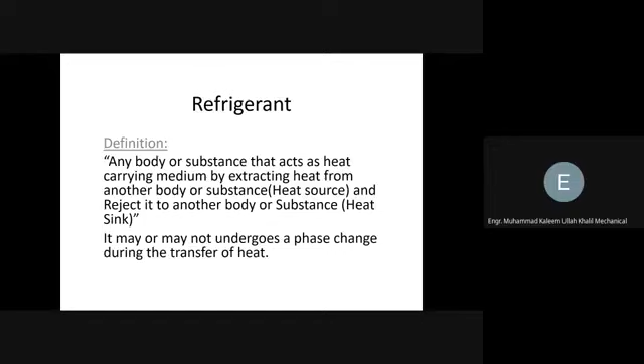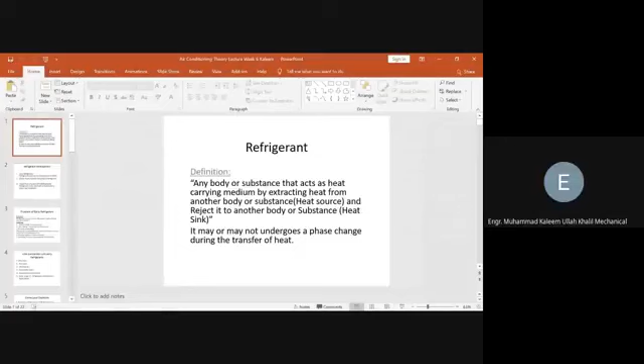Initially, we had early refrigerant prior to the development of CFCs.

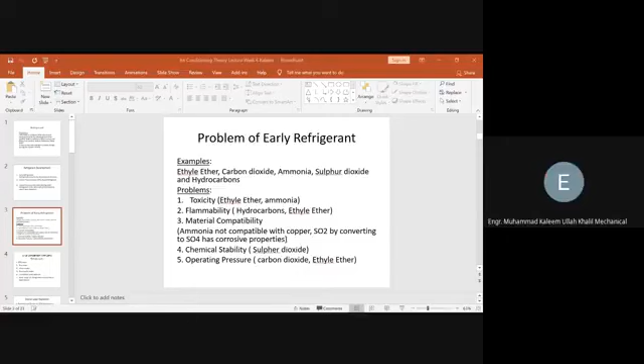Chlorofluorocarbons were non-toxic, they were inflammable, they were chemically stable, they were compatible with the material, and the wide range of the refrigeration temperature application were possible with the chlorofluorocarbon.

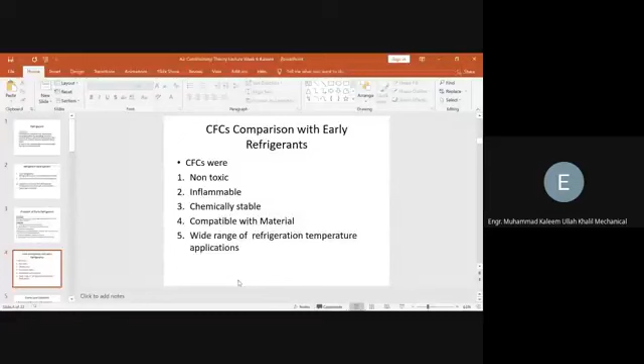اچھا، سو لیٹس گو ٹو دا نیکسٹ سلائڈ۔ جس طرح میں نے کہا ہے پریویس سلائڈ میں دیٹ دا سی ایف سیز ور ریسپانسبل فار دا اوزون لیئر ڈپلیشن، اور اس کی فرسٹ جو تھیوری پیش کی تھی وہ دو سائنٹسٹ نے پیش کی جس کو میں نے بلٹ فارم میں لکھا ہوا ہے۔

ان 1974 they developed the theory of ozone layer depletion due to CFCs۔ ٹھیک ہے، کس طرح سے اوزون لیئر ڈپلیٹ ہوتا تھا، اور پھر ایک پروٹوکول جس کو مونٹریل پروٹوکول کہتے ہیں، اس میں مختلف کنٹریز نے ایگریمنٹ کی کہ اس کو ہم بین کریں گے۔

اور ان ریفریجرنٹس کو جن کی وجہ سے اوزون لیئر ڈپلیٹ ہوتا تھا اس کو بین کیا گیا، اور بیننگ کے بعد لوگوں نے اس پر سٹڈیز کیں، اور اس کے بعد ہمارے پاس یہ ایچ ایف سیز بن گئے جن کی اوزون لیئر ڈپلیشن پوٹینشیل زیرو تھی۔

تو کس طرح یہ اوزون لیئر ڈپلیٹ ہوتا ہے اس کے لیے کچھ کیمیکل ایکویشنز وغیرہ ہم لکھیں گے اور اس سے یہ کلیئر ہو جائے گا۔

اچھا، سو فار دیٹ آئی ول گو ٹو دا پینٹ فائل، اور اس سے پہلے ایک سلائڈ میں کاپی کروں گا۔ ٹھیک ہے، اچھا، اس میں ایک منٹ۔

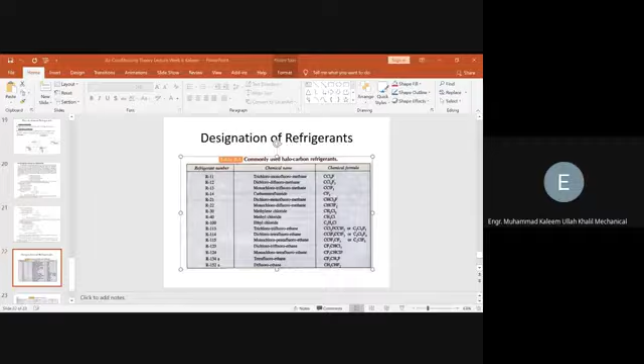اچھا، which element was responsible for the ozone layer depletion? The chlorine atom in CFC۔ ٹھیک ہے، اس کے کچھ ایکویشنز ہیں، کیمیکل ریئیکشنز ہیں، وہ ہم تھوڑا سا اسٹڈی کریں گے۔

اچھا، آپ کو پتہ ہے کہ ہمارے پاس ارتھ کے سراؤنڈنگ میں یہ پینٹ فائل شیئر ہو گیا ہے یا نہیں؟ یس سر۔ اچھا، ایک دوسرا فگر ہے، یہ بھی میں پیسٹ کر دوں تاکہ آپ کو پتہ چل سکے۔

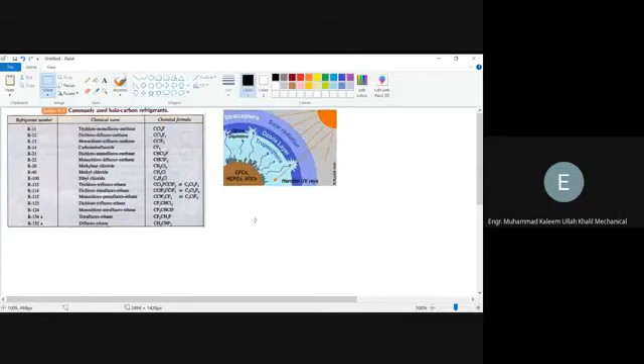یہ نظر آ رہے آپ کو؟ یس سر، جی سر، یس سر۔

اچھا، اس میں یہ لکھا ہے، یہ اندر جو پنک ٹائپ کا ایک سرکل ہے، یہ سی ایف سیز، ایچ سی ایف سیز اور وی او سیز ہیں۔ یہ وی او سیز کا مجھے نہیں پتا کہ یہ کیا چیز ہے، لیکن کلورو فلورو کاربن ہے اور ہائیڈرو کلورو فلورو کاربن ہے۔ ایچ سی ایف سیز، ایچ اسٹینڈ فار ہائیڈرو، سی اسٹینڈ فار کلورو، ایف اسٹینڈ فار فلورین اینڈ لاسٹ سی اسٹینڈ فار کاربن۔ They are basically the derivative of the hydrocarbon, اور these are responsible for the ozone layer depletion۔

تو ارتھ کے سراؤنڈنگ میں ایک لیئر ہے جس کو ٹروپوسفیئر کہتے ہیں، اس کے بعد ہمارے پاس اوزون لیئر آ جاتا ہے، پھر اسٹریٹوسفیئر ہے۔ تو سن سے ایک طرف ریڈیشن ایمٹ ہوتی ہے، ان میں مختلف ریڈیشن ہیں، ان میں سے ایک ultraviolet radiation ہے۔

That ultraviolet radiation can reach up to the stratosphere layer, but when it meets the ozone layer, it cannot pass through because the ozone layer is made of O3 and that can absorb or filter all of the radiation, filtering out the ultraviolet radiation. Now what happens is when CFCs are charged inside the unit and by some unfortunate situation they leak out of the unit and go to the troposphere, they are chemically stable. Once they reach the ozone layer, inside the ozone layer they cause the depletion.

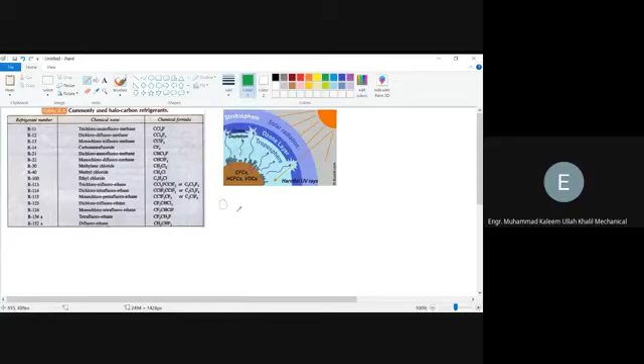اس کے لیے ہم کچھ کیمیکل ایکویشن لکھیں گے۔ سب سے پہلے ہمارے پاس جو اوزون لیئر ہے وہ کس طرح سے بنتا ہے۔ آپ کو پتہ ہے کہ ایئر کے اندر آکسیجن مالیکیولز ہوتے ہیں۔ یہ الٹرا وائلٹ ریڈیشن کی پریزنس میں جب میچ ہوتی ہے تو اس سے دو ایٹامک آکسیجن بن جاتے ہیں، اور یہ ون ایٹامک آکسیجن اگین کمبائن ود دا O2 اور وہ O3 بناتے ہیں۔

This O3 is basically the ozone layer, one of the molecules of the ozone layer. اس O3 میں کیا ہو رہا ہے، O2 جو ہے O میں کنورٹ ہوتا ہے اور پھر O2 دوسرے O کے ساتھ مل کے O3 بنا دیتا ہے۔ تو الٹرا وائلٹ ریڈیشن اس میں ایک طرح سے یوز ہوتی ہے۔

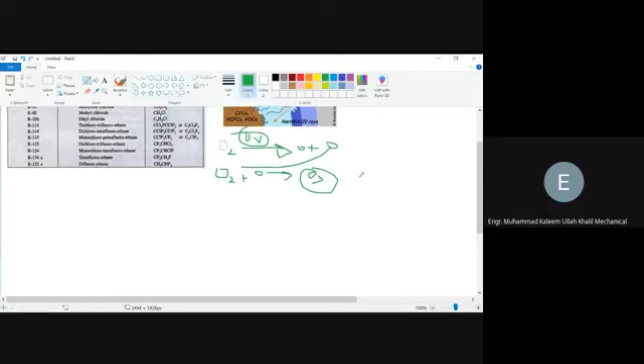سملرلی جب CFCs یعنی کلوروفلوروکاربن، اس میں R12 جو ریفریجرنٹ ہے، اگر اس کا فارمولا دیکھیں تو دس از ڈائی کلورو ڈائی فلورو میتھین۔ یہ میتھین سے بنا ہوا ہے اور اس میں دو ہائیڈروجن کلورین سے ریپلیس ہوئے ہیں اور دو ہائیڈروجن فلورین سے ریپلیس ہوئے ہیں۔ میتھین کا کیمیکل فارمولا دیٹ از CH4۔

اب اس میں جو 4H ہے اگر اس میں سے دو کو کلورین سے ریپلیس کر دیں، تو ڈائی کلورو، اور دو ہائیڈروجن کو میں ریپلیس کرتا ہوں کلورین سے۔ ایز اے ریزلٹ، اور باقی ہائیڈروجن کو فلورین سے ریپلیس کر دیں تو ہمارے پاس یہ ریفریجرنٹ بن جائے گا R12۔ اس کو R12 کیوں کہتے ہیں یہ آنے والی کلاس میں پڑھیں گے کہ کس طرح یہ R12 ہے۔

بیسیکلی اس میں یہ فلورین ایٹم ہے this is not responsible for the ozone layer depletion while the chlorine atom is responsible for the ozone layer depletion۔ تو لیٹ سے یہ مالیکیول الٹرا وائلٹ ریڈیشن کے کیس میں جب اس کو الٹرا وائلٹ ریڈیشن مل جائے تو ایز اے ریزلٹ اس سے ایک ایٹامک کلورین پروڈیوس ہو جاتا ہے، in the presence of the ultraviolet radiation۔

یہ کلوروفلورو کاربن جو ہے R12 ریفریجرنٹ، اس میں ایک ایٹامک کلورین پروڈیوس ہو جاتا ہے اور ایک بائی پروڈکٹ ہمیں مل جاتا ہے CClF2۔

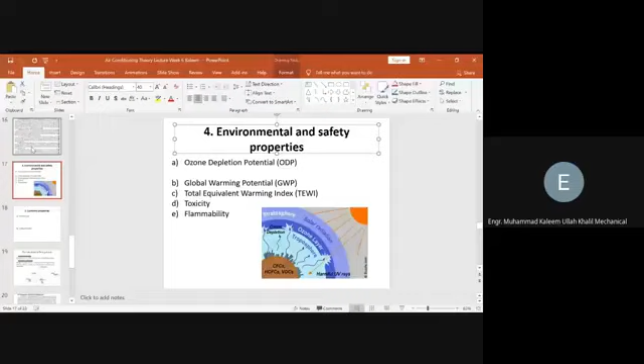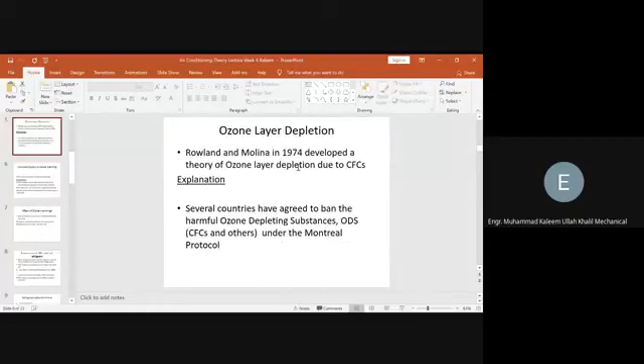Okay, so the second disadvantage was the contribution to global warming, CFC's contribution to global warming.

First of all, tell me what is global warming. Any student can answer. What is global warming? The average increase in temperature on the Earth's surface, sir. Say it again. The average temperature increase on the Earth's surface, sir.

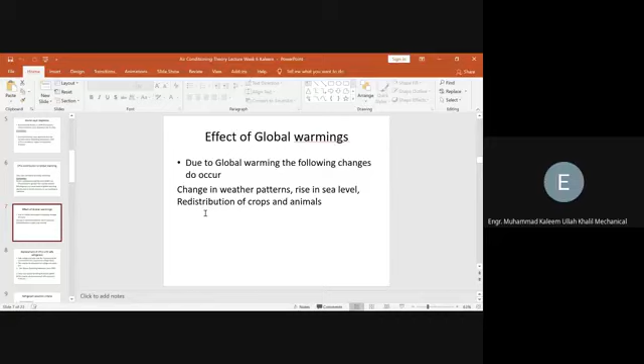Safe refrigerants, both safe for humans and for the environment, are required for refrigeration.

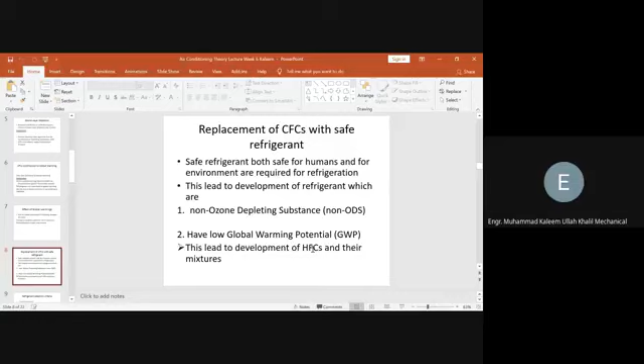Now the second discussion will be the refrigerant selection criteria. On what criteria should we select the refrigerant if you are designing a refrigerator or air conditioner? There are 5 different properties. The first one is the thermodynamic property of the refrigerant. This is very important if you are improving the performance of the system, or, in short words, if you are improving the COP.

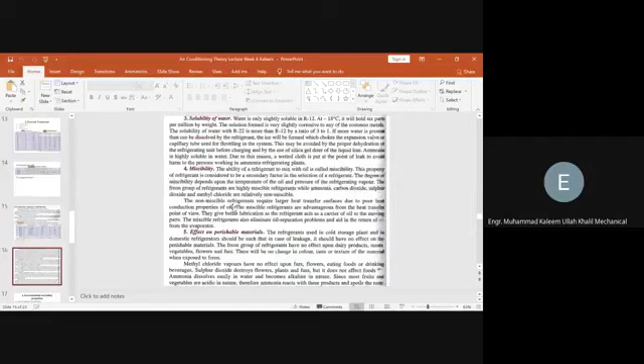What is their impact? Then there are physical properties. We should also look at the physical properties because they tell us about the stability, the inertness, and compatibility with the material. Similarly, there are the chemical properties, such as flammability, toxicity, solubility in water, miscibility, and effect on perishable material, which we will discuss over here. We will study these one by one.

No, the most important out of these 5 properties is the environmental and safety property. We should not compromise on this property number 4. We can compromise on the other properties, but first we have to make that refrigerant environmental, as well as we will make it safe for the human beings that are residing inside that building. So we should not compromise on the property number 4. Otherwise, we can compromise on the other properties.

Similarly, we can compromise on the economics of the refrigerant because we can compromise on the price. We cannot compromise on the environmental and the safety properties of the refrigerant. We have to keep this in focus, or we have to keep it on our priority list.

So the thermodynamic properties are the evaporator pressure. Now I have a question: what will be the impact of the refrigerant regarding the evaporator pressure? Let's say the evaporator temperature, the design temperature that is required inside the evaporator, is 5 degrees C. So you have a list of refrigerants which can provide you the 5 degrees C temperature, but some of the refrigerants can provide this 5 degrees C temperature at a high pressure, while some provide that temperature at a low pressure.

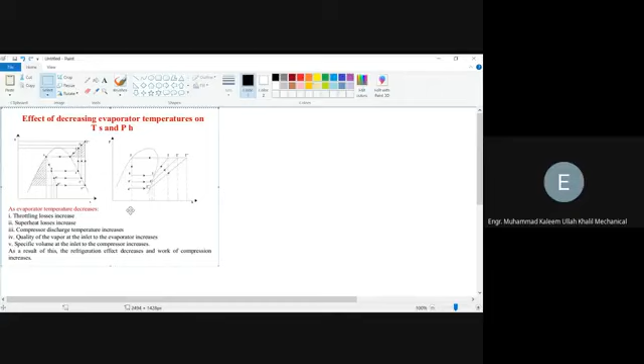The highest one. Because with the highest pressure, the operation starts from point 4, and onward from 4 to 1, the refrigerating effect is high because the throttling loss is very small from 4 to 1. Similarly, the work required during the compression from 1 to 2 is very small as compared to that one. Are you getting this point or not? Yes, sir.

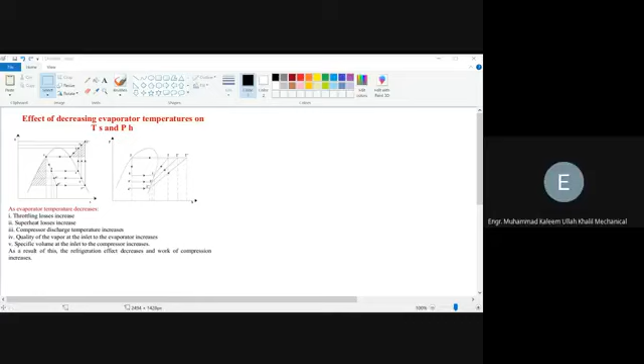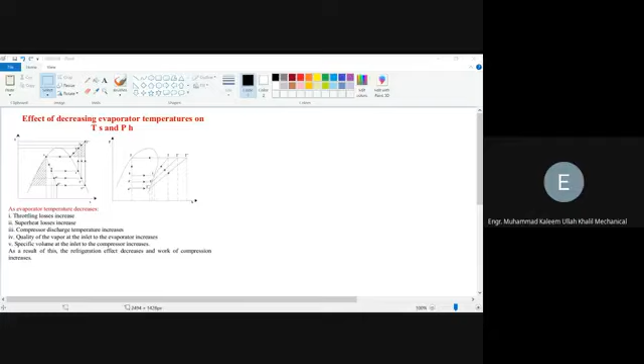So let's say you have 5 refrigerants, and out of the 5 refrigerants, one refrigerant is providing you 5 degree C temperature in the evaporator, and that is at a high pressure. So you will select that refrigerant out of that list. Okay?

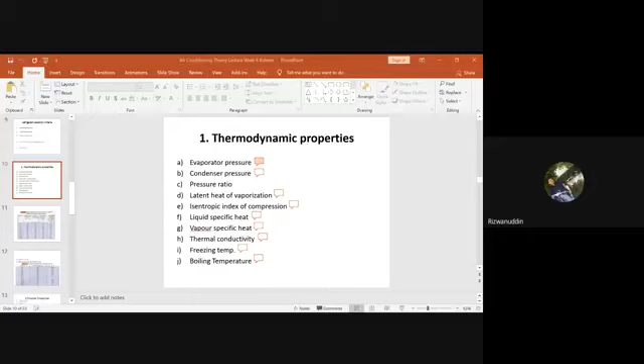Exactly. The work of the compressor basically depends on the exit pressure, or the discharge pressure of the compressor, as well as the inlet or the suction pressure. So with respect to the suction pressure, you need to make the suction at a high pressure. If the compressor is pumping it from the high pressure, the initial is high pressure and the final you have also reduced, so the work consumed inside the compressor will basically be low.

So you need to select that refrigerant which can provide you the design evaporator temperature at a high pressure, and also, if that refrigerant is capable of providing you a low condenser pressure for the design temperature of the condenser, then that refrigerant will be beneficial with respect to the performance, that is the COP, the coefficient of performance of the unit. Any question on property B, which is the condenser pressure?

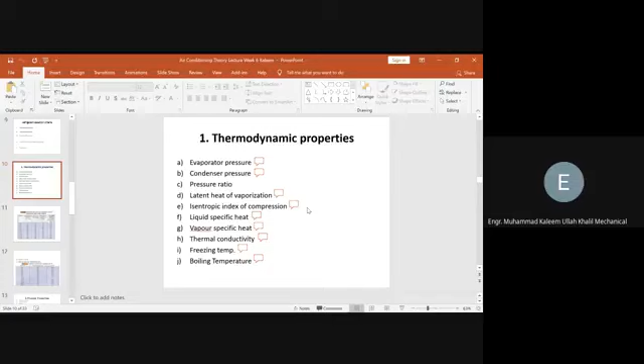Since isentropic compression is taking place inside the vapor compression process, the index of compression will be gamma. So the refrigerant which has a high gamma value, the exit temperature after compression will be very high. So you will select the refrigerant which has a low gamma value, for which the exit temperature of compression will be a little lower, and that will not be sufficiently high to cause burning or overheating of the compressor material.

You can also confirm this from this comment. Here it is written that the isentropic index of compression should be small, because the temperature ratio Tc by Te, which is the condenser temperature to the evaporator temperature, is equal to Pc by Pe, the pressure ratio of condenser to evaporator pressure, raised to the power gamma minus 1 by gamma. So greater the value of gamma, the higher this whole power value will be.

So when this is high, Tc will actually be high, because if we multiply by Te on both sides, we can cancel Te in the denominator, and on the right side it comes in as multiplication. So Tc actually depends on the pressure ratio raised to gamma. So greater the gamma, higher will be the exit temperature of the condenser or the temperature of refrigerant leaving the compressor. This should not be very high, because it will produce a very high temperature at the exit.

And since the electrical windings inside the compressor are directly in contact with the refrigerant coming out of the cylinder of the compressor, once they come out of the cylinder and piston, they come into the casing in which the whole cylinder and piston arrangement and the electrical winding are enclosed. So if the temperature is very high, it can cause heating of the electrical winding of that particular hermetic type compressor.

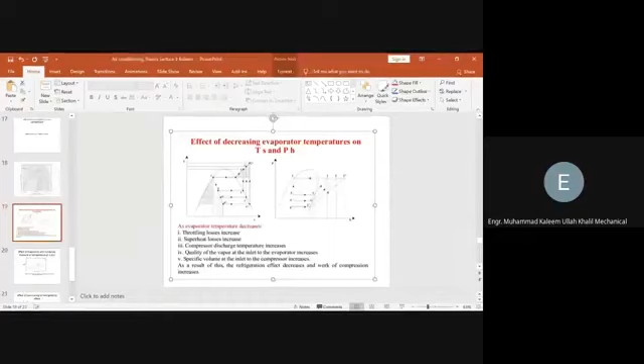Can anyone tell me the effect of subcooling on the COP?

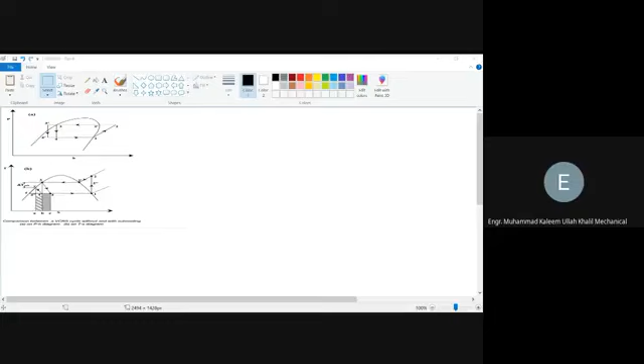Can you see this slide?

The property G is the vapor specific heat of the refrigerant. The liquid specific heat should be low so that you can bring a large change in its temperature in order to get the advantage of increasing the subcooling, which actually increases the refrigerating effect.

But the vapor specific heat should be very high. What is the advantage of high vapor specific heat? It means you need to provide a large amount of heat to the refrigerant to increase its temperature by 1 degree. If the refrigerant enters the compressor at high temperature, the volume sucked by the compressor will be high, the specific volume will be high, while the density of the refrigerant will be very low.

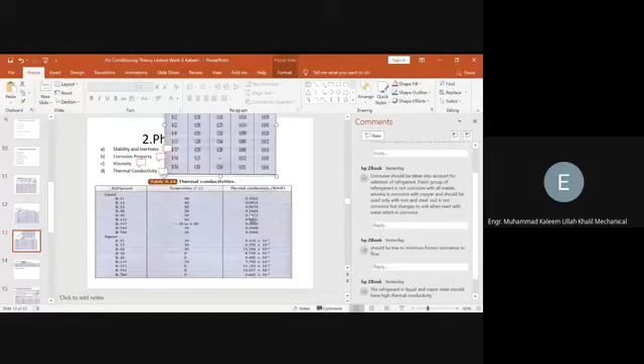Let's go back to that slide. Or what about the freezing temperature of the refrigerant? Let's say the design evaporator temperature is 5 degrees C, and you are using the refrigerant which has the freezing temperature of 5 degrees C, or higher than 5 degrees C, then you cannot use that refrigerant in that unit, because at 5 degrees C it will freeze inside the evaporator and it will choke the whole unit.

It will stop the flow of the refrigerant, because some of the refrigerant will freeze or change into the solid state, and once the tubes are closed, that is known as the choking of the tubes, then the refrigerant will not be able to circulate inside that unit. So at the given design evaporator temperature, you will need to select the refrigerant which has a very low freezing temperature compared to that evaporator temperature, because inside the vapor compression cycle you are using the expansion device.

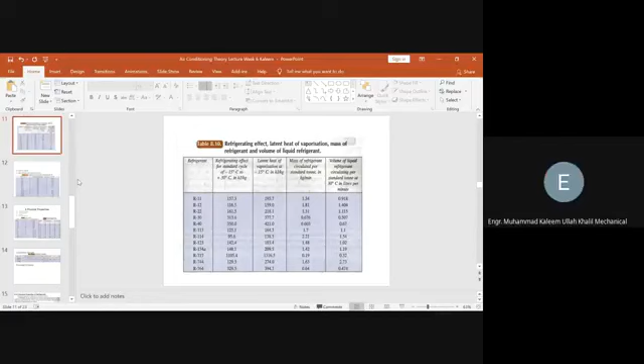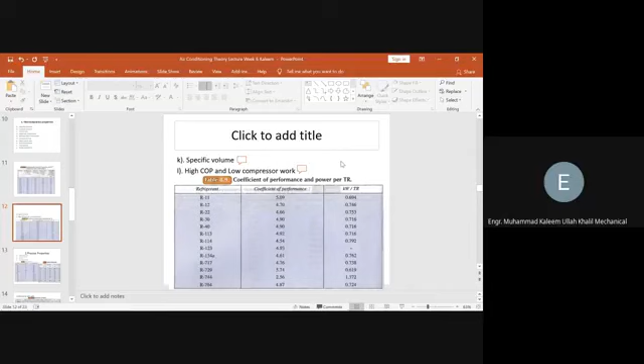It should be inert, it should not react with the tubes, pipes and the compressor material during its flow. This is property A. So that refrigerant will be used which is stable at the given design evaporator temperature and pressure, and it is also inert. It has no property to react with the material of the system. So you will choose that refrigerant. Similarly, the second property is the corrosive property. The refrigerant that you are using inside the unit should not have the corrosive property. It should not react with the material to make it corroded.

Similarly, the third property is the viscosity of the refrigerant. Now, you tell me whether high viscosity or low viscosity of the refrigerant will be required inside the unit. लो विस्कोसिटी सर। Why?

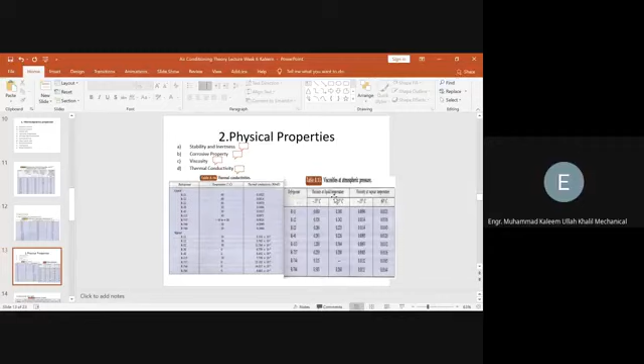You can say thermodynamic, but this is actually a physical property. So again, it should be high. Heat transfer between the refrigerant and the source, which is the air, उनके बीच thermal conductivity अगर refrigerant की high है तो आसानी से वो heat exchange कर सकेगा। ठीक है ना?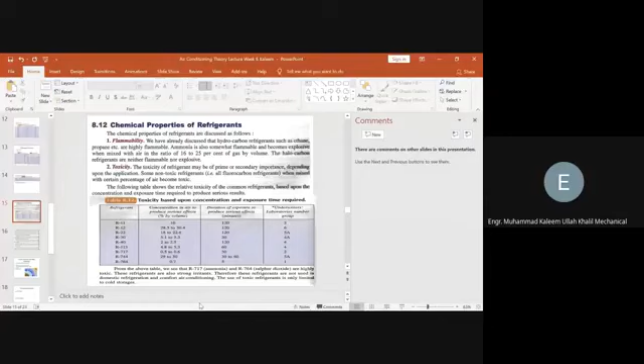So if the refrigerant is toxic and it leaks to the room, it may have ill effects on the human being. So you will look at the list and you will select such a refrigerant that is non-flammable and that is also non-toxic. Okay, so let's go to the next slide.

Solubility of the water. Every refrigerant has a certain solubility limit for the water, and this water comes from the surrounding air, and this phenomenon is actually caused due to the leakage. You know that if the air leaks into the unit, then the air has a small amount of water inside it. So if the air leaks into the unit and it mixes with the refrigerant,

there will be water, and if the water is completely soluble in the refrigerant, it will circulate in the whole unit, although it will decrease the performance of the refrigerant in terms of the heat absorbing capacity and heat rejection capacity. Also, let's say a large amount of the air is leaking to the unit, and the solubility limit of the refrigerant is crossed, then what will happen?

The extra amount of the water which will come inside the unit, which is not soluble, will circulate as a second phase in the refrigerant. When it comes inside the evaporator, you know that inside the evaporator the temperature is very low, so that extra amount of the water will actually freeze inside the unit. And if that water freezes inside the tube of the evaporator, it will block the flow of the refrigerant, and as a result the choking of the unit will be caused.

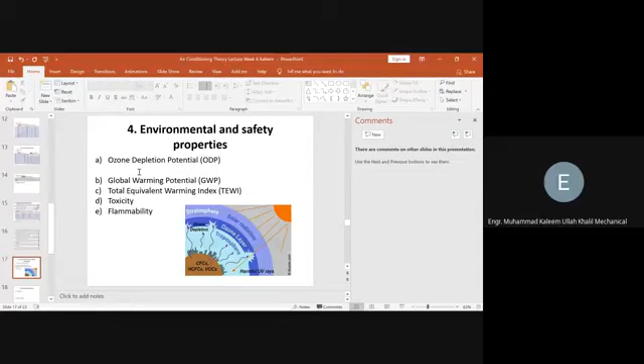Yes sir. Acha. The second property, which is not too much important, you can compromise on the cost of the refrigerant, but if you are considering its cost, your focus should be that the refrigerant should be inexpensive and it should be easily available in the market.

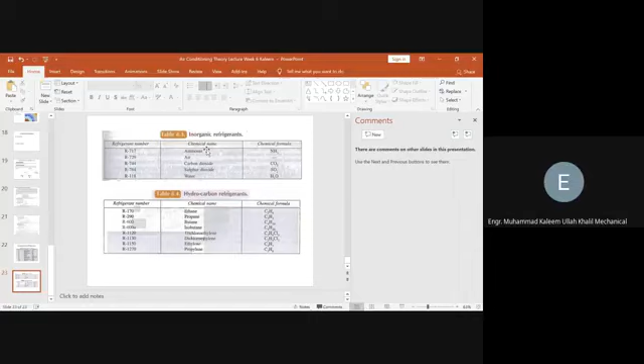Are you getting it or not? Yes sir, clear.

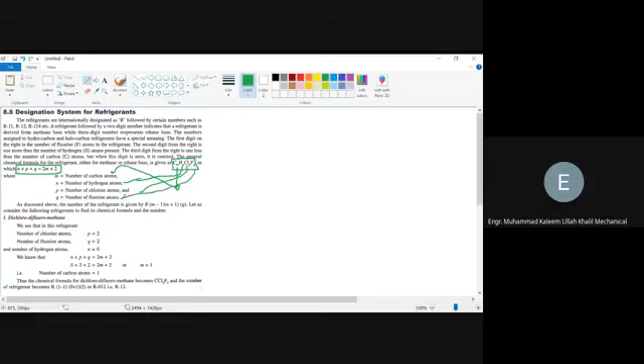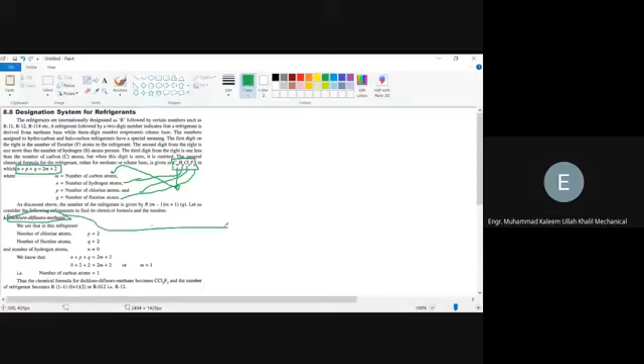Fluorine atoms. So let's say there is a refrigerant whose chemical formula is given by dichloro-difluoromethane. First of all, it is originated from methane. What is the formula of methane? CH4. Tell me, what is the formula? CH4.

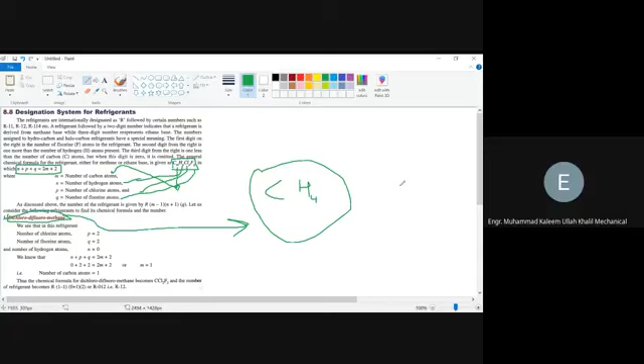So dichloro-difluoromethane, what does it mean? There are two chlorine atoms - how many chlorine? 2 chlorine and 2 fluorine. So this is the chemical formula actually.

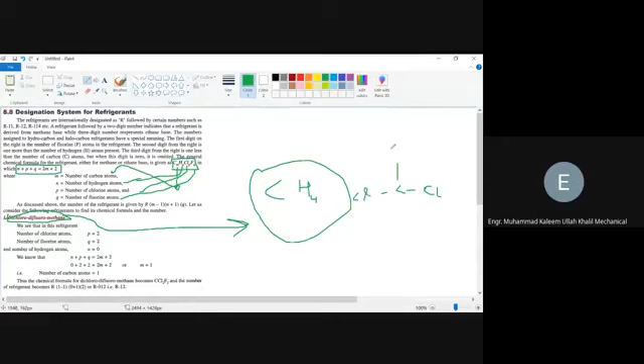Let me first designate it with the given procedure, and then, inshallah, you will be able to designate any refrigerant. We are given this formula and we want to designate it.

Now the rule for the designation is that you place R, and after R the first digit will be M minus 1. This is the rule. I'm writing it again here so it's clear to you. And the second digit will be N plus 1. Tell me, what is the third digit? Sir, Q. And the third digit is Q.

So R dash will be general - you first write R dash. For the first digit, you look at the number of M's, which is the number of carbon atoms. So M in this case is what? M is 1. So you put 1 over here: R dash 1 minus 1.

And the second digit is N+1, where N is the number of hydrogen atoms. So how many hydrogen are in this formula? Zero, sir. There is zero hydrogen. So you will put 0 and 1.

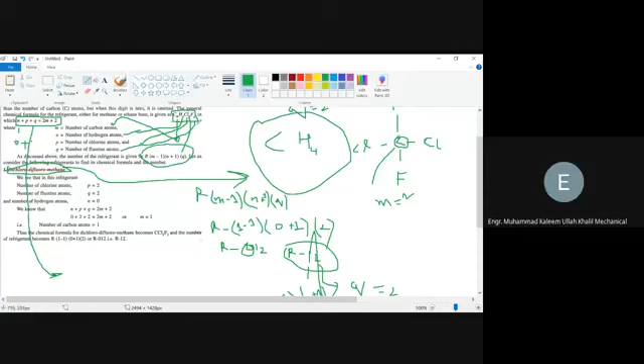And Q is 2, and M is 1, so 2 multiplied by 1 is 2, plus 2. Taking this 2 to the other side, P will be equal to 4 minus 2.

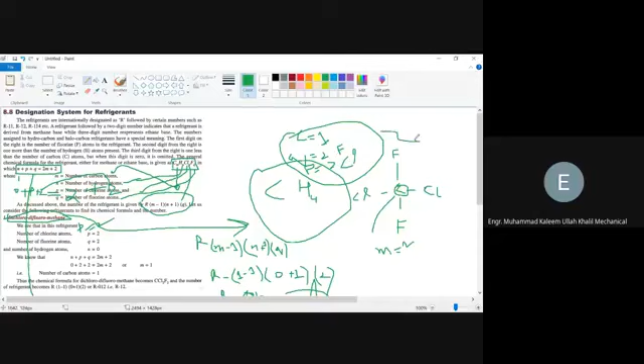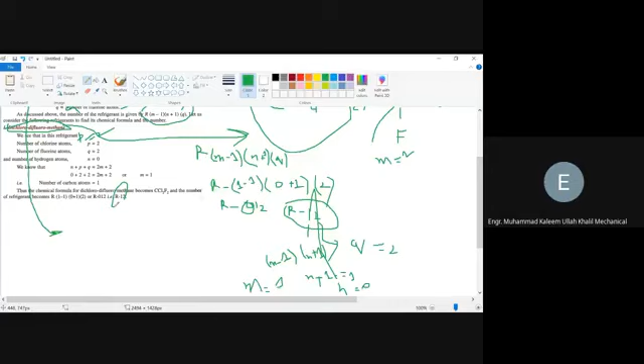Okay. Yes sir, hello? So this is actually the procedure.

Now we will apply this procedure on the other refrigerant, and we will designate it also. So first finish the synthetic one, then we will go to the hydrocarbons also. Let me again share that file, and let's look at what will be the procedure.

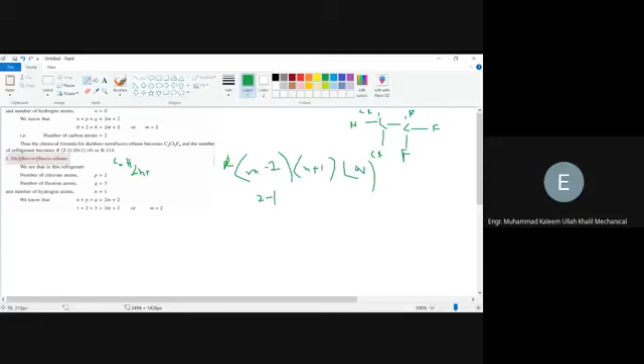You can apply the formula of alkane series, CnH2n plus 2, which you have studied in FSc. So there are 2 carbon actually, so it will require 6 hydrogen. Now combinedly there is trifluoro, 3 fluorine, and dichloro, 2 chlorine. So 1 element is missing and that 1 element is actually hydrogen.

So you don't need to write its structure formula. You can also point out from its chemical formula how many hydrogen are left. So the remaining element will always be hydrogen. So there is 1 hydrogen atom. So instead of N we will write 1, and then the Q is, there are 3 fluorine, so you will write 3. So it will be actually 1, 2 and 3. This will be the designation of this refrigerant.

Okay. Yes sir. Okay, let me share the remaining portion also so you can finally locate its designation. 1 minute. This is its remaining portion. So you can see that its designation is R123, and we also find it out over here. Okay? Yes sir.

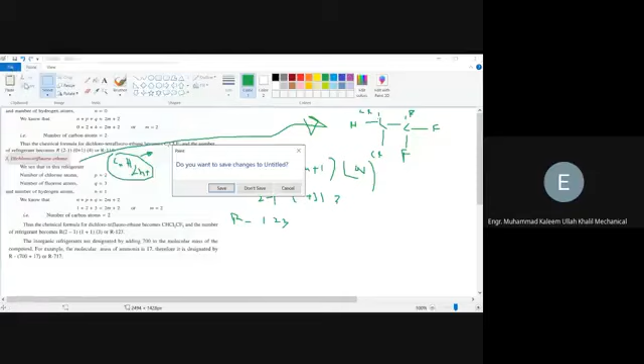Okay? Yes sir. This is the procedure that you need to understand to designate the refrigerant. Let me look at the slide and what is left. We should discuss it. Now, the second method is left for the hydrocarbons. So let me paste it over here and let's discuss how they are designated. Can you see this file? Yes sir. There are hydrocarbon refrigerants: alkane series as well as alkene series, which are unsaturated. Now there is a difference between the saturated one and the unsaturated one.

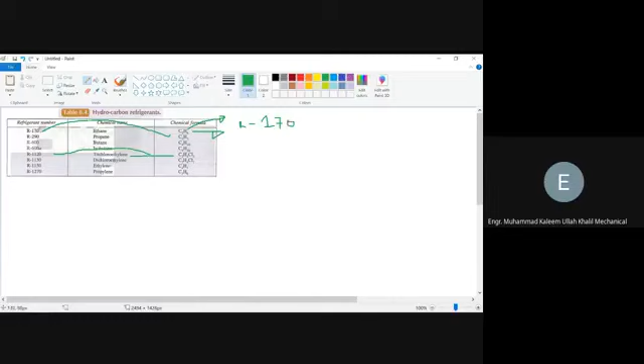And the third digit is for fluorine, and there are no fluorine atoms in it, so that will become 0. So it will become R170, which we have also derived over here. Are you getting this or not? Yes, sir. Now let's look at the third one, propane. How many carbons? There are 3 carbons, so 3 minus 1 is 2. And how many hydrogen are there?

Propane, 3 multiplied by 2 is 6 plus 2. This formula is also wrong. This is H8, okay? This is not H3. This is not a propane formula.

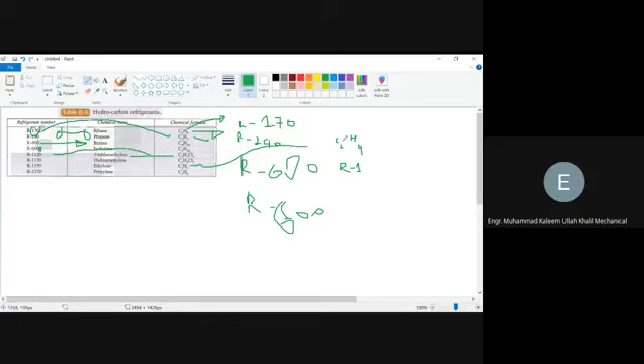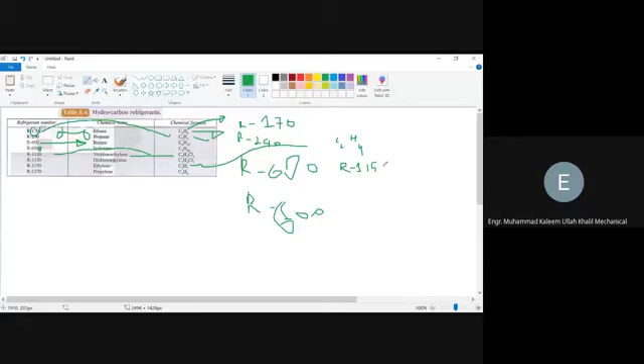There are 2 carbon atoms, so 2 minus 1 is 1. There are 4 hydrogens, so 4 plus 1 is 5. And there is no fluorine atom, so it will become 0. So this is the designation of ethylene. So you need to look at its chemical formula. If the carbon is fully saturated, then you will apply the previous rule.

If it is unsaturated and there are double bonds in it, if the formula is not following the rule of the alkane series, which is CnH2n+2, then it means that it is unsaturated. Then after R, directly you will write 1, and after that you will follow the same procedure. Are you getting this or not? Yes, sir.